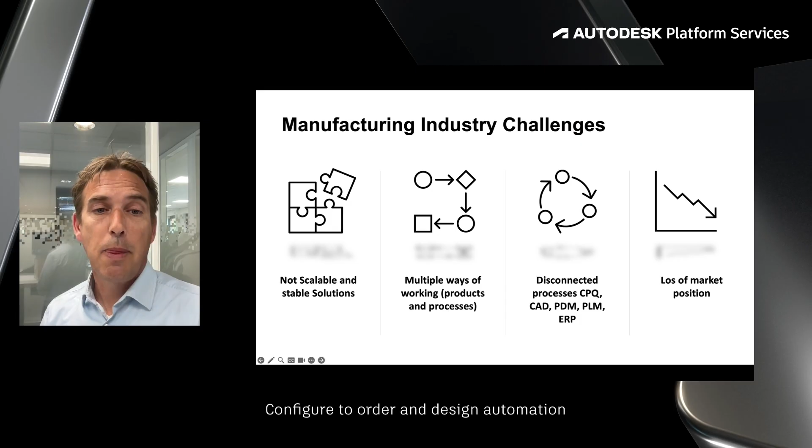So in current times, we see a number of challenges that many companies struggle with. Finding the right balance between product leadership, customer intimacy, operational excellence, it's not easy. So let's talk about some more specific challenges for the manufacturing industry. Application customization causing unneeded downtime, leading to errors and troubleshooting. One-person armies and external dependencies, loss of data, double and manual workload, no reuse of data, long lead times in sales and engineering processes. Or common challenges in the construction industry.

Global earnings before interest and tax on construction activities is just 5.5%. So even the smallest mistakes can make or break the project. And projects are becoming increasingly more complex, yet the schedules keep shrinking. 80% of construction companies cannot find the workers they need. Teams are becoming more and more distributed, with stakeholders split between various offices and the field. And we believe that adopting a configure to order strategy in your company will help you to overcome these industry challenges. So let's take a deeper dive into what we mean with configure to order.

When we look at our customer processes, we recognize in general three types of primary business processes. We identify these processes as configure to order, engineering to order, and design to order. There are two main differences that separate these three types of processes. The first difference is about the moment in time when the required product data is being created. For CTO, the product data is already prepared and available upfront in the process. For ETO, some adjustments or small new designs are created after the order is received. And for DTO, design to order, more development cycles are required, so the actual useful data is being created at a later stage in the process.

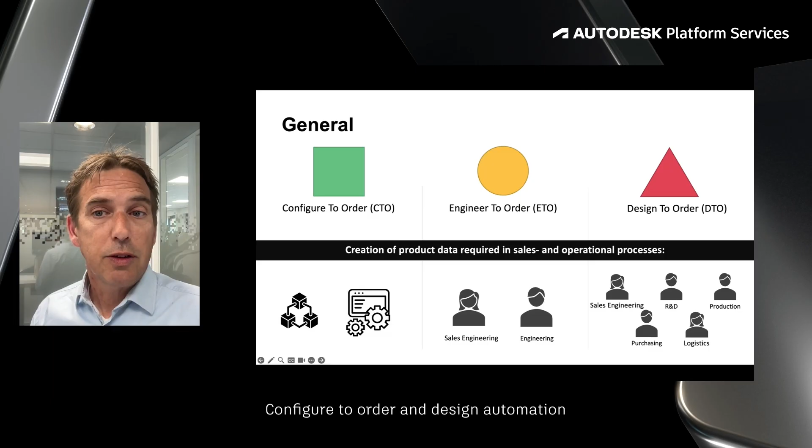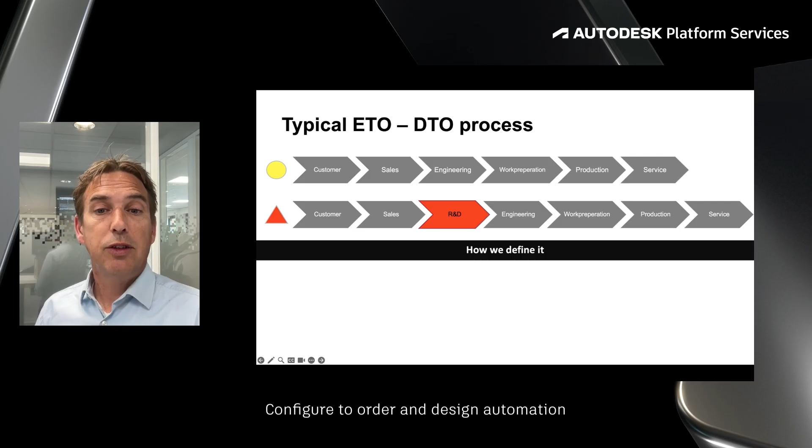On this slide, we see two main processes often defined as ETO and DTO. Both processes begin with a customer and a salesperson getting clarity and an agreement on the commercial and technical requirements. Once there is an order, the engineer starts by designing the product. And once new functionality is required, R&D people join the process. When the product is released, work preparation and purchasing can start with calculation and purchasing components. If all the required components are produced and delivered, the assembly process can start. After testing, the product can be commissioned and installed at a customer site, and maintenance is transferred to the service organization. Within these processes, people refer to a product as a one-of-a-kind product, specials, or customer-specific solutions.

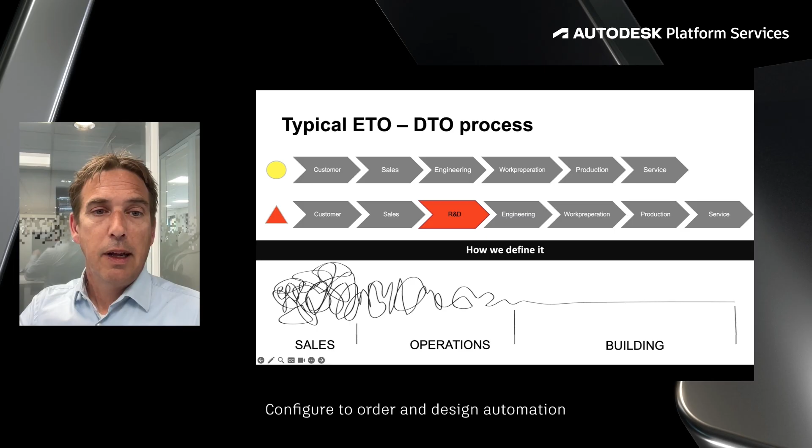At the bottom, we see how these processes are being experienced by the people within the process. Due to all kinds of missing information and unclarities within the specification process, a lot of communication and rework needs to be done to be able to deliver a functional product. It appears that every time these processes are executed, they are experienced for the very first time. So to get a better understanding, let's take a look at some first-time experiences.

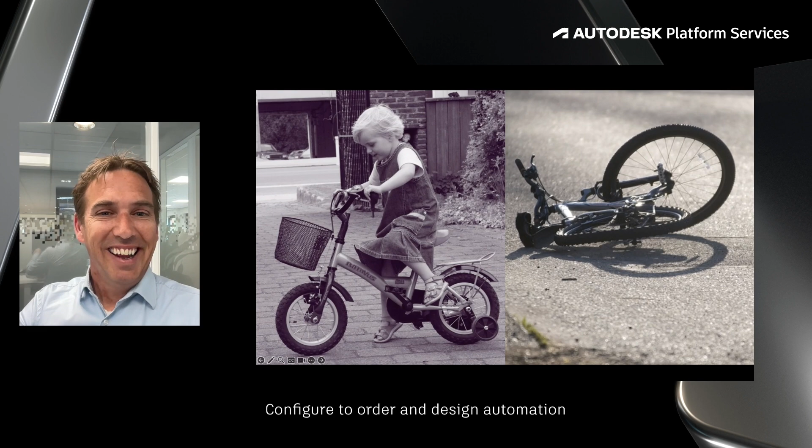In the Netherlands, everybody is used to riding a bike. We have about 18 million people and 22 million bicycles. So to be able to survive on a bike in Dutch traffic, we need to learn to ride a bike at a very early age. And what was it like riding a bike for the very first time? For me, it didn't work out that well. Yeah, as well as driving a car for the very first time. The first time didn't go well either.

So try to imagine what happens if we perform a cycling activity for the 1000th time. We have developed and prepared our equipment, we know where to go, and we know when to finish. We're able to improve every time we perform the activity. It goes a lot better.

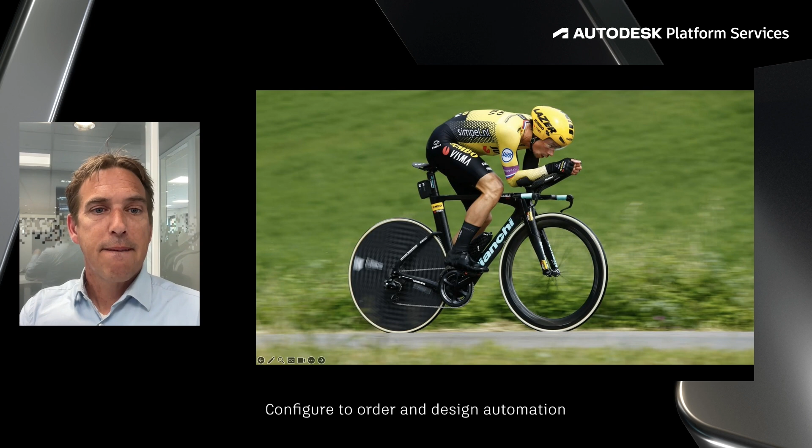So Mark is going to show you how configure to order can help you out, and what it means for the processes and people in your organization. So Mark, please introduce yourself. Thanks, Pim. Thanks for the introduction of our CTO process. My name is Mark Brouwers. I'm a developer working at the same company as Pim, so we are colleagues at Cadac. So I want to continue with the technical in-depth information on how we achieve this CTO process.

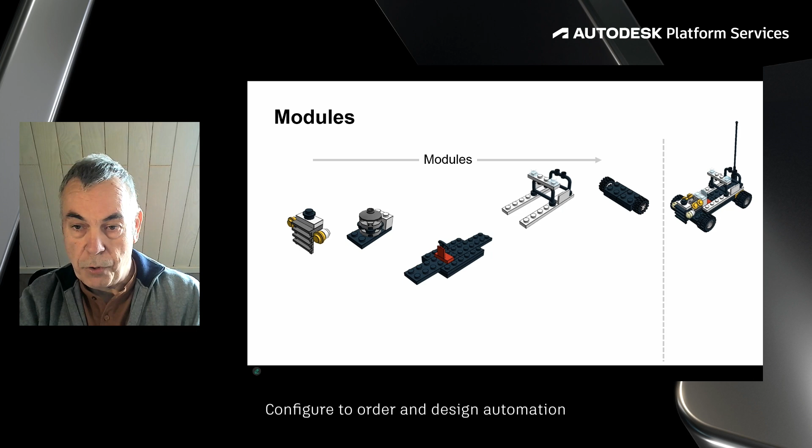Imagine the Lego car on the right side of the slide as one of the specific products of your customer. For a manufacturing company, this product could be a machine. For a construction company, the product can be a house. Every product consists of some typical components. These collections of components we call modules. In general, we see that a module is a generic collection. It has no physical representation or identification. So on the screen, we see 5 modules. A front module, an engine module, a chassis module in the center, a body module, and an axle module on the right side.

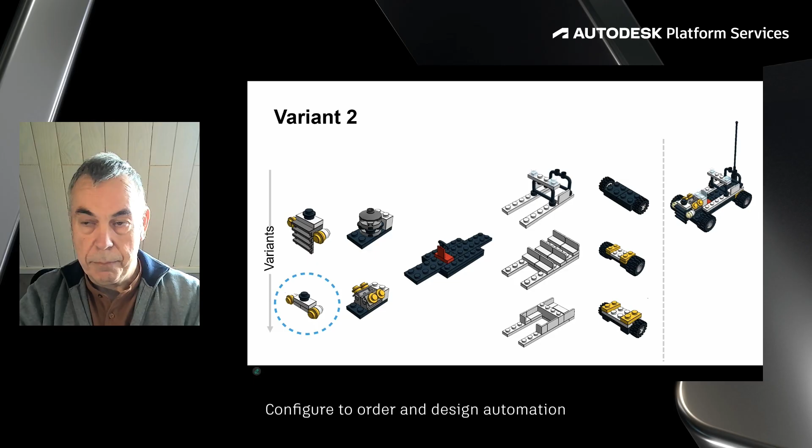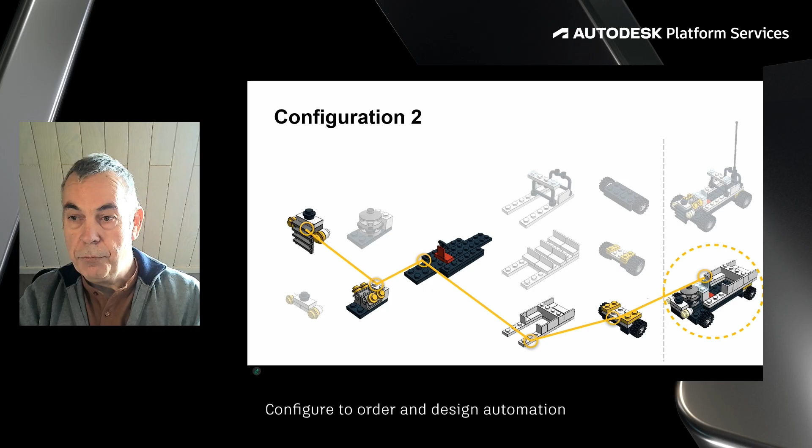As you can see, there's one exception. The chassis located in the center of the slide. There is only one variant of this module. So this means that every car uses the same execution of the chassis. So this makes some people very happy. All right, to create a product, we need a certain set of interfacing variants which can be combined. The product in the yellow circle on the right, we call a configuration. So if we want to create a different product, we use a different set of variants to create a different configuration.

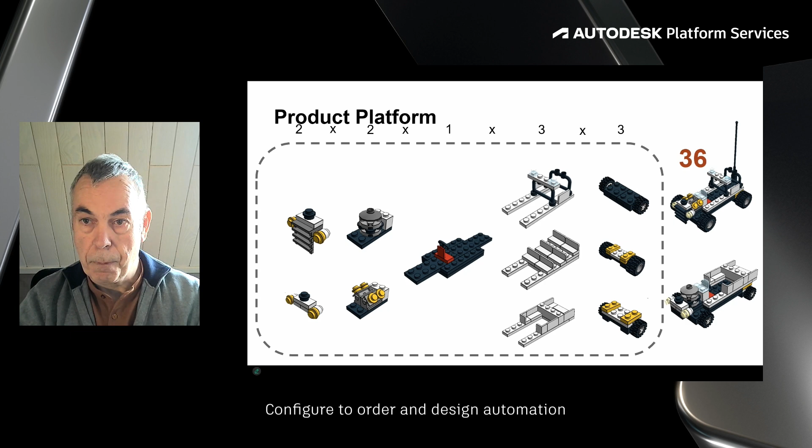So the collection of all those variants, we call this a product platform. It is important that the content of the product platform matches the market needs for a certain period of time. This is where product management begins. In this example, the Lego product platform consists of 11 variants. So this is the sum of all the variants. Instead of the sum, we can now multiply the variants. That gives us 36 unique product configurations. So with 11 variants, we can create 36 configurations. And we maintain the specifications and documentation of only these 11 variants instead of 36 end products. So that's a huge difference in terms of workload for the organization.

This picture shows how to identify the type of product deviation in the product structures of a configuration. The CTO product configuration contains only variants from the platform. So it is a 100% CTO configuration. If the product contains any ETO or DTO specifications, the interaction with the other variants needs to be validated at the product level. Of course, we embrace and stimulate the use of CTO variants within ETO and DTO products as much as possible.

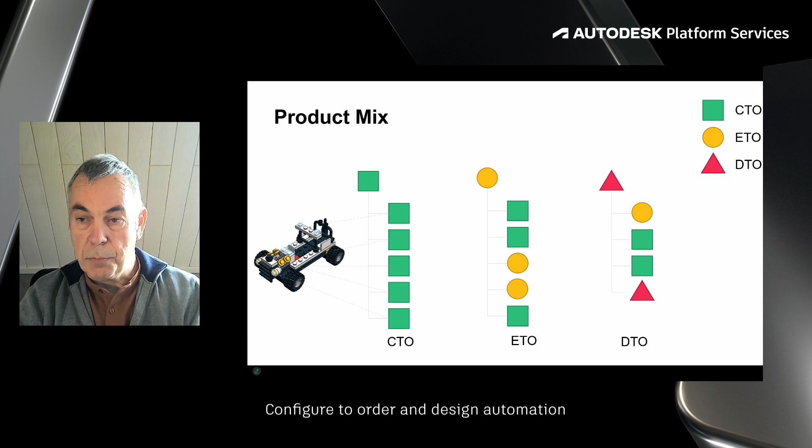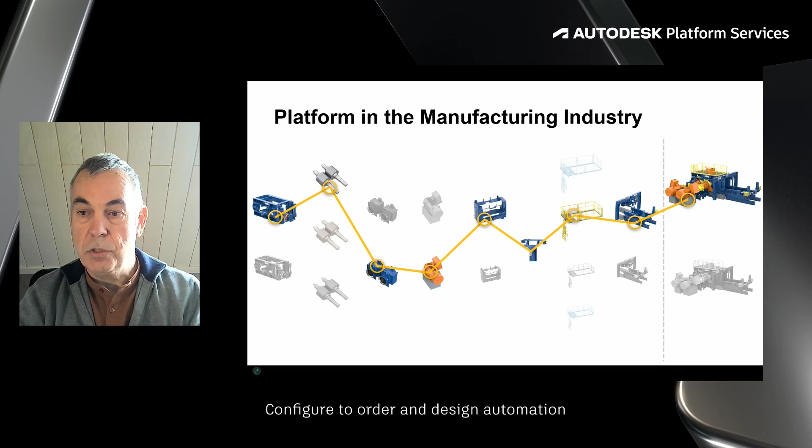So the first thing a company should do when implementing a configure-to-order strategy is defining a product platform. In this example, we see a derivative of the product platform of one of our customers within the manufacturing industry. So if this is possible with Lego or within the manufacturing industry, why not within the construction industry? So imagine this example with facades, doors, windows, window openings, window frames, and bricks. In this example, we already have 324 different configurations as an end product for the facade.

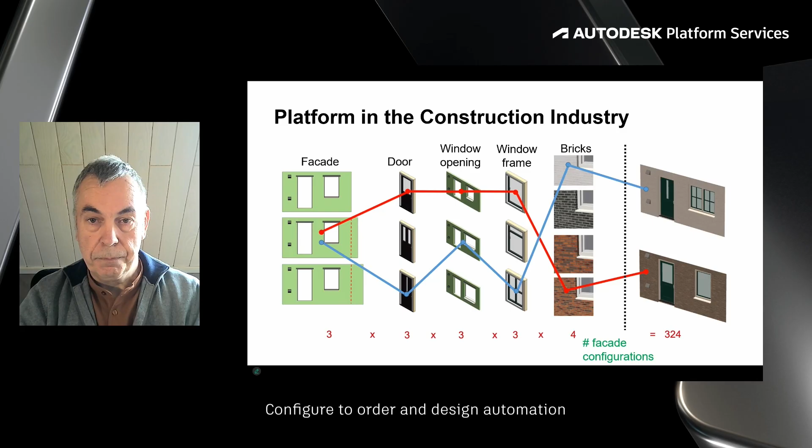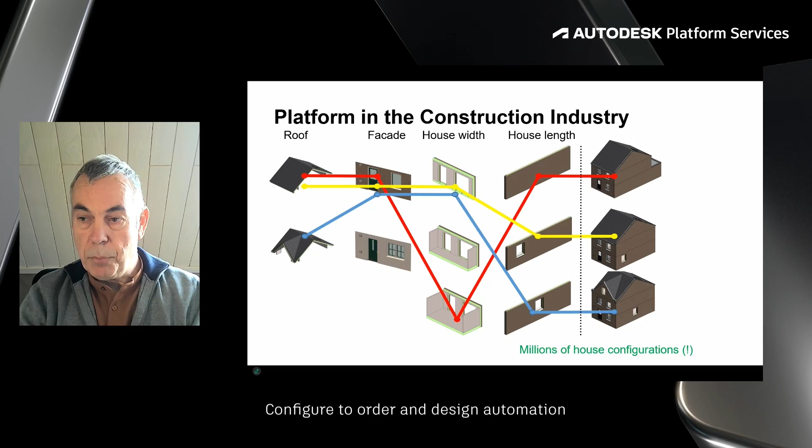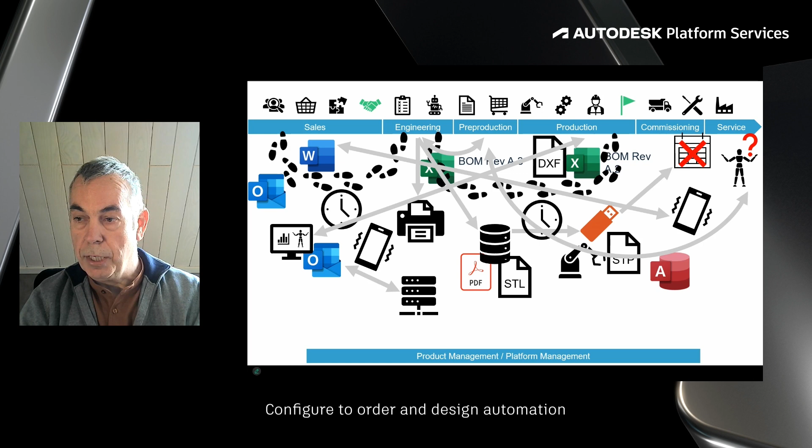All kinds of applications support a specific part of the process. We see that integrations are most typically solved via point-to-point connections, a direct connection between two information systems. Point-to-point connections appear in many forms. For example, as a commercial plugin, as a manual export, as a custom solution made by an external expert, or via some tool found on the internet. This tangle of one-on-one integrations is not scalable into the future and very difficult to maintain.

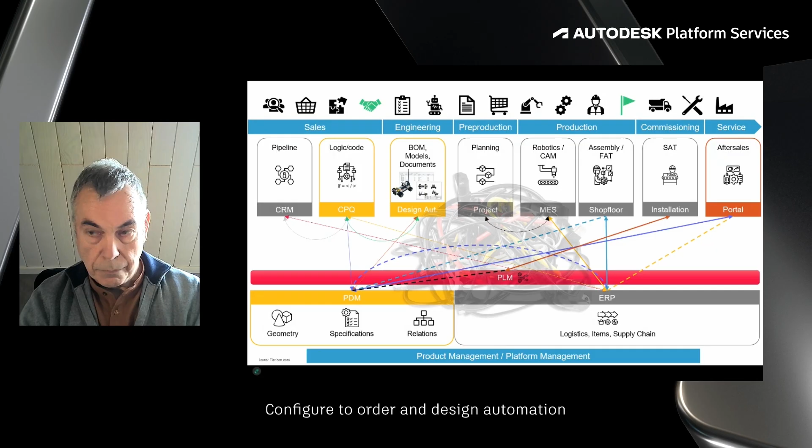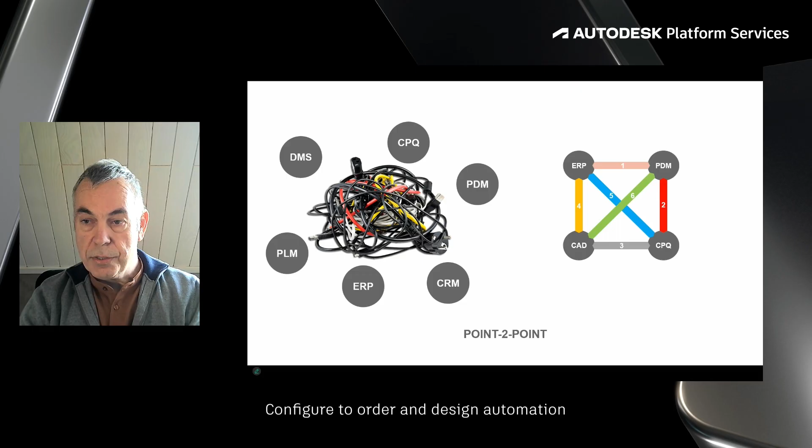Managing point-to-point connections can be a challenge because they rarely come alone. In practice, many point-to-point connections exist in the form of scripts running on different servers, log files created on locations all over the place, etc. This is an issue since central overview is lacking. As a result, changed data still gets overlooked and related processes simply go wrong. The alternative is an integration platform with the objective of centralizing the data exchange between information systems by means of clear orchestration and the shared technology for setting up each point-to-point integration.

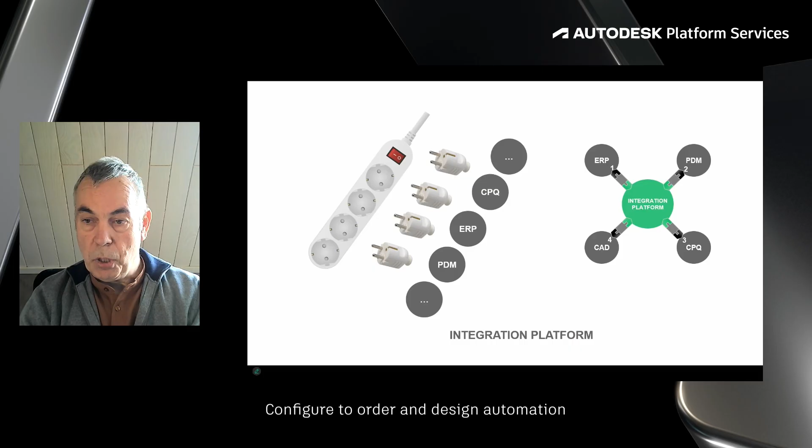Each organization is unique, as are related integration requirements. So in order to fit within existing processes, the system integration should be flexible. The flexibility can be offered by using a low-code platform. This slide is showing an overview of applications within an organization connected through an integration platform. Each application has a connector, a connection to the platform. There are many standardized connectors for the most used applications, but as long as the system has a REST API, a connector can be created easily.

Within one or more scripts, the business logic to read or write information in the system is customized. Instead of a spaghetti of connections between applications, it offers a very structured methodology which can be expanded over time. For this presentation, we will focus on the CPQ, design automation in APS and PDM.

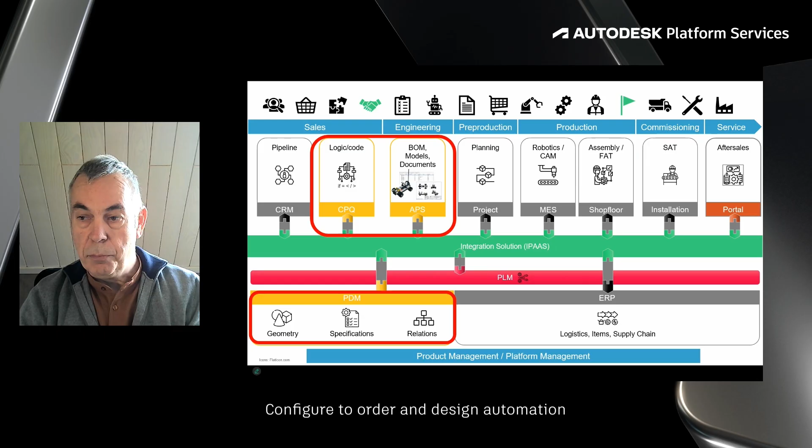The design automation process in combination with the PDM system is a very complex process, involving a very large number of automated actions. As a result, there are also many possible points of failure. If one part of the process fails, it could leave a mess behind with unused documents in your PDM system, and it will cost a lot of time to do this all over again. Therefore, we implemented a phased methodology in our design automation approach. The complex process is split up into 4 phases: prepare, process, assemble, and manage.

We will take a look at each phase in a moment, but one thing to point out is the flexibility of this phased approach. By splitting up the design automation process, we have the ability to outsource the processing part, where Inventor or Inventor Server does the magic. The process phase in this case is offloaded to Autodesk Platform Services.

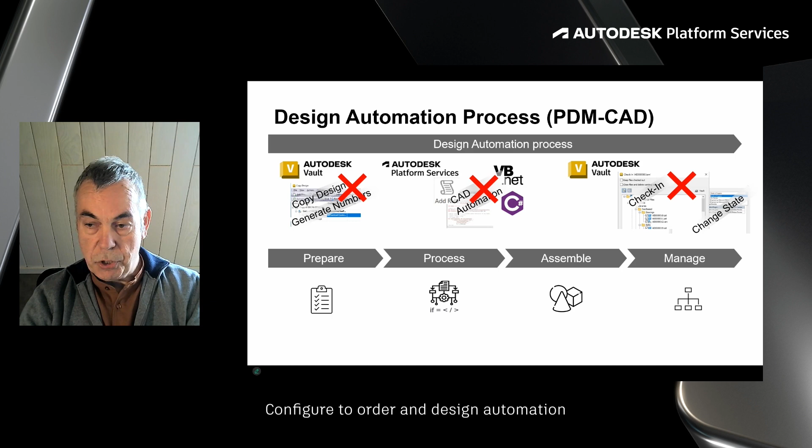Let's take a detailed look at the phased approach and how the whole process comes together. At first, the integration platform receives a message from an external system, in this case the CPQ system. Scala Connect acts as a conductor of the whole process through a so-called orchestration script. This type of script is capable of creating a task, and it will wait until the task reports back to the script.

The first task involves adding a preparation job to the Vault job queue. When the job is picked up by a job processor, it will take up the input passed on from the CPQ system through the integration platform. Input could be, for example, the product type to instruct Vault to create a copy design of a base model, the destination folder involved, and so on.

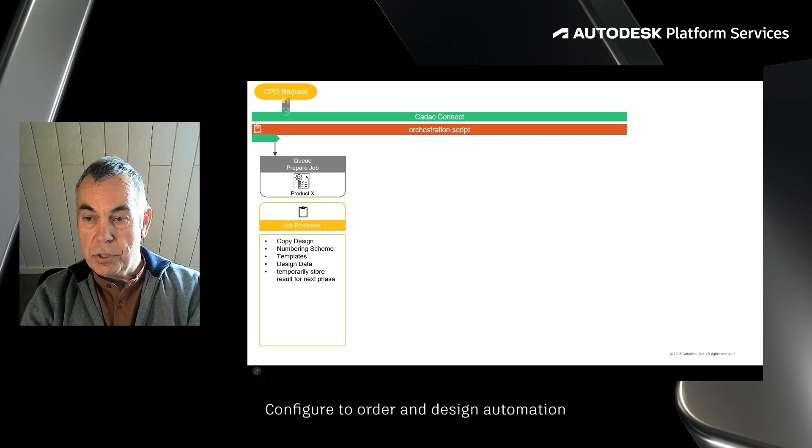It can also retrieve templates and design data to ensure that the next phase has all the input necessary to be processing. The gathered data is temporarily stored in a zip file in Vault. Then the job reports its status back to the integration platform, and the orchestration will start the next task.

The second task involves the starting of a workflow in APS. This workflow contains several steps. The upload of the activity definition. This has to be done because it has to be changed between two configurations. Uploading the app bundle. Same goes here. The app bundle could have been changed over time.

Uploading the results of the prepare job to a bucket. The zip file containing the copy designed files is being placed so that APS can reach out for them. Configuring a work item with the parameters from CPQ. Then start the work item. During this step, the custom code, so C# and iLogic code, will be executed and the copy design structure is formed into an order-specific model.

Download the results from that work item into a bucket. Assemble all the generated models that are present in CPQ, so in your code. This type of task is optional and will only be required if two or more process products need to be assembled together. Download the final assembly with all the configurations and upload it into Vault, and notify the main orchestration in the integration platform that this phase has been completed.

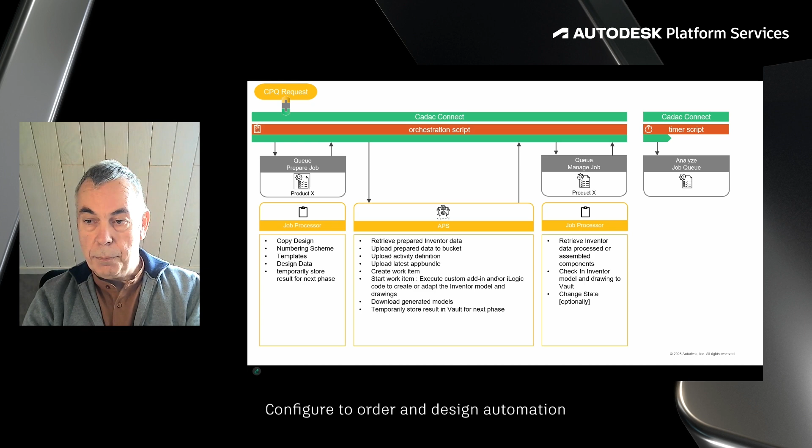The nice thing to point out about the platform is that it can handle many tasks in parallel. In this example, you can see a separate timer script that runs every couple of minutes to monitor the job queue. And when there are more than, let's say, 50 design automation jobs in the job queue, the script can start an additional Azure virtual machine to help handle the jobs. With all this in mind, the system is capable of scaling itself up and down.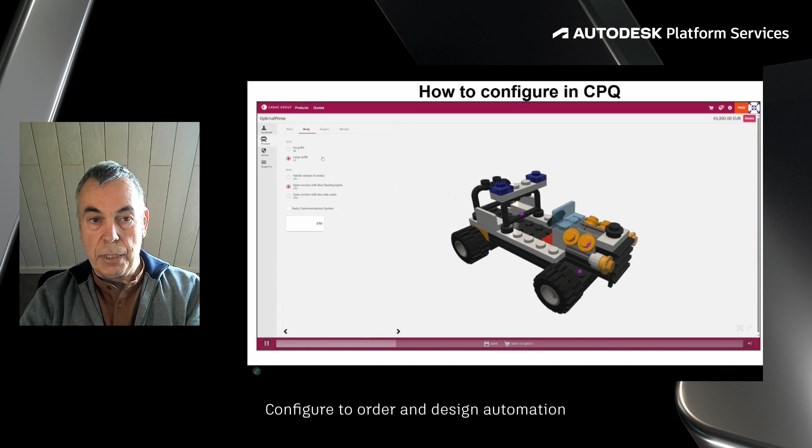Afterwards, you can use this default configuration and start adapting something. In this case, when you change the length of the antenna, the system knows that it's no longer CTO, but it switches over to ETO. You define the reason you have to change it to an ETO. Additionally, you can per product specify which type of Autodesk engine you want to use, Inventor Server or APS, and even the version. You can even change some custom parameters.

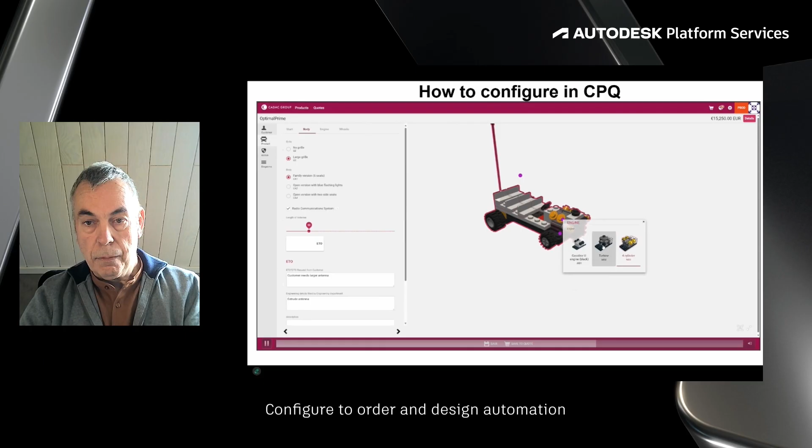Once finished, you save your final product definition to the quote. You enter a quote identification, and you start your workflow. So by submitting this quote, you will start the workflow in CPQ. It comes to a state ETO because it was an ETO product. So the main engineer approves this quote and it will start in the state building the model.

So what we can do in CPQ is define the engine to be used, the flavors and even the version that you want to use, and you can alter all parameters of your product configuration. So we now have in CPQ a quotation with, for example, 6 cars present, so that have 6 configurations that have to be created during the process.

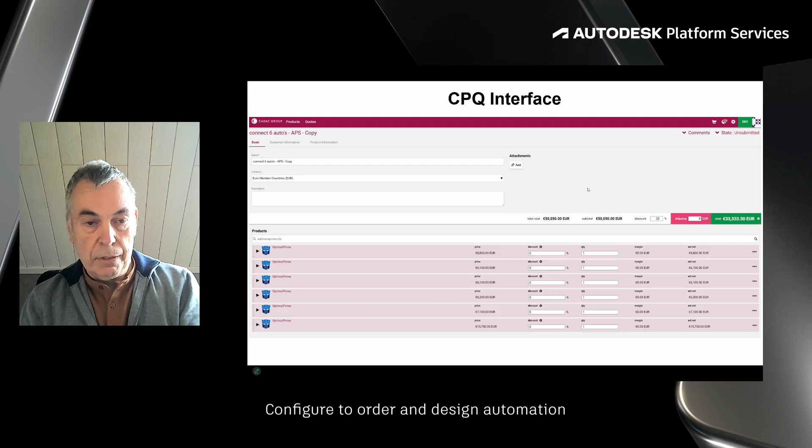How is the CPQ data transferred into the workflow in Connect?

Depending on the structure in CPQ, a JSON fragment is constructed in the CPQ workflow. For each configured product present in the quote, a configuration has to be created by Inventor. At the same time, some parameters necessary for the Vault design automation jobs are pushed towards the orchestration, such as numbering scheme, assembly name to copy design from, and the app bundle to use.

Once the orchestration is started, its implemented workflow will create the different types of Vault jobs. These jobs will execute their implementation and use the callback URL to signal when the job has run. This external information is processed inside the orchestration, which will cherry-pick this information for each stage in the process.

Nowadays, most job processors reside in the cloud and can be started or stopped when needed. As soon as the main orchestration is triggered, a first check is performed to see if any job processor is running. If not, start the machine, and if there are too many jobs waiting, start an additional one. The main orchestration then receives a list of available machines to pick from.

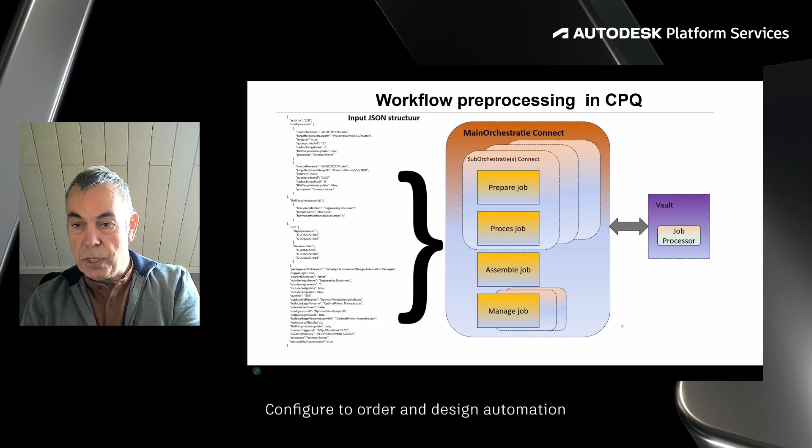Within CPQ, there's a workflow active. As soon as you submit your quote, this workflow is started. At a certain moment in this workflow, the quote triggers a function in Connect. The main orchestration is launched and provided with the necessary parameters as indicated in the previous slide.

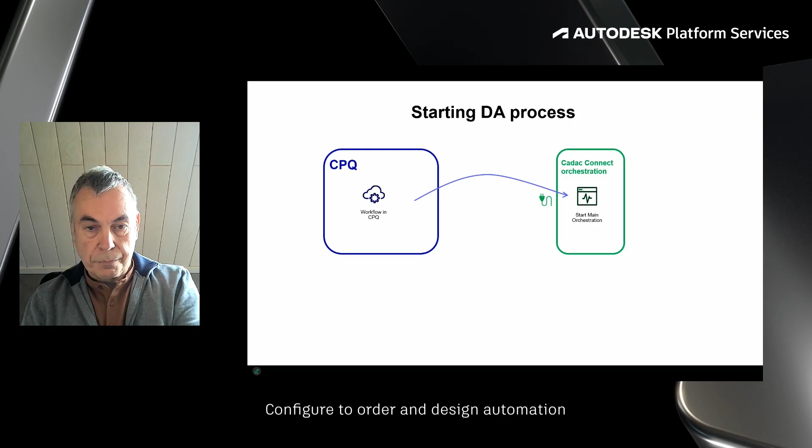The first task of the orchestration is uploading the activity and uploading the app bundle to APS. This app bundle was stored in Vault. This is mainly a user interface-less process. I will show you some of the logging.

Here is the URL triggered, the main orchestration is triggered. As you can see, an app bundle is uploaded, and the activity is uploaded into APS and set ready to be used in a later phase of the process.

As soon as it reaches the stage of creating the Vault jobs, the prepare job makes a local copy design of an assembly that you specified in your CPQ system. It makes a local copy design, but with Vault numbers generated from Vault. The copy design structure is afterwards packed and go and stored in Vault as a zip file. This zip file will be used in the second step when the CAD model is being processed.

The logging indicates that you got 2 process jobs. On the job processor, this job is picked up and executed, starting its work by making a copy design of a predefined assembly.

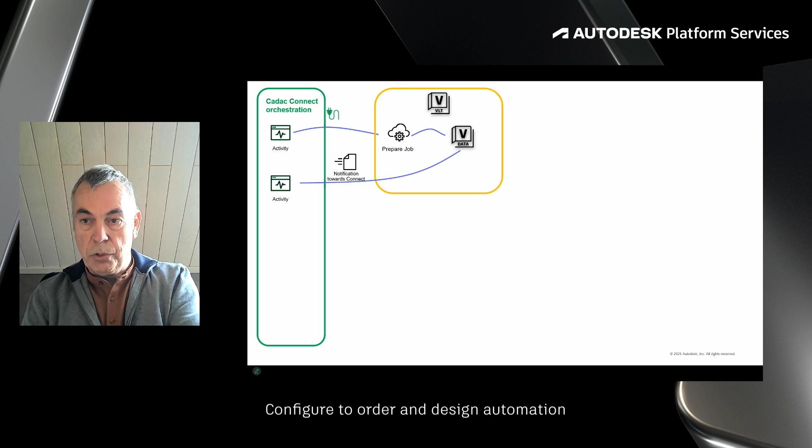As soon as the prepare job finishes its work, the main orchestration in Connect is notified, indicating that the job has done its work, and the next phase in the process can start.

The next phase consists of uploading the packed and go prepared data into a bucket. We create a work item and assign its parameters with data from CPQ. We start the work item and download the results as a zip file as soon as the work item has finished, placing that result back into Vault.

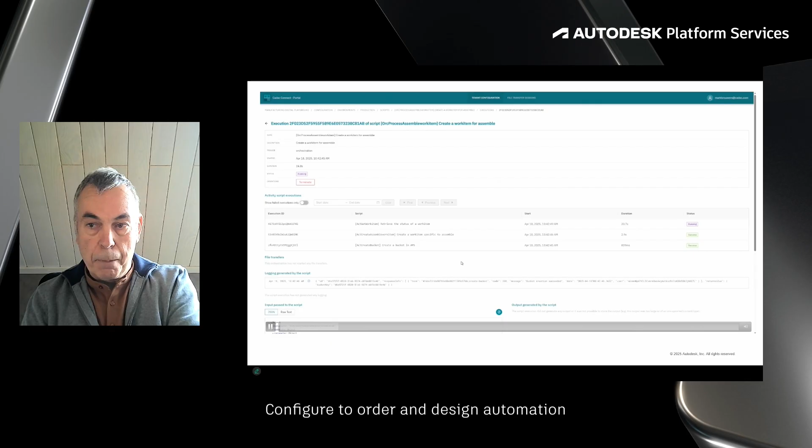A work item is created and started in APS. Data is uploaded to the bucket, and the work item is started. We check to see what it's doing, and get a report when finished. Let's see what's in that report.

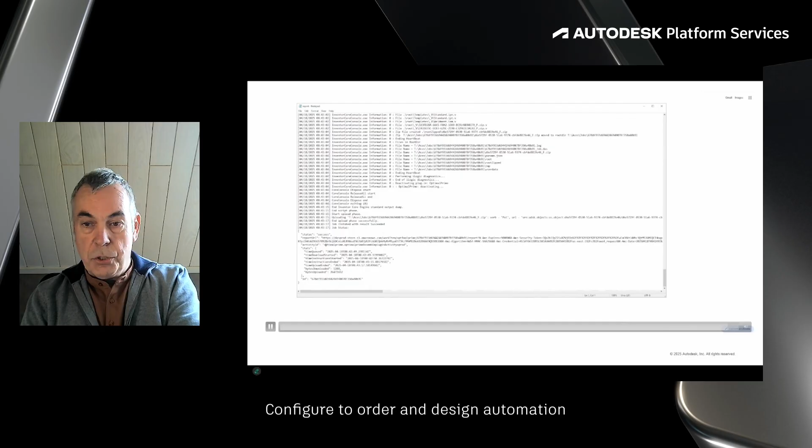The work item has run its custom code. There's a lot of logging present that we can inspect to see if something went wrong. As soon as this runs successfully, the resulting zip file will be downloaded to Vault.

APS has finished configuring the configured products from CPQ and needs to check in the results. The intermediate stages are buffered in Vault as zip files. The final result zip is picked up and opened in Inventor, then checked into Vault.

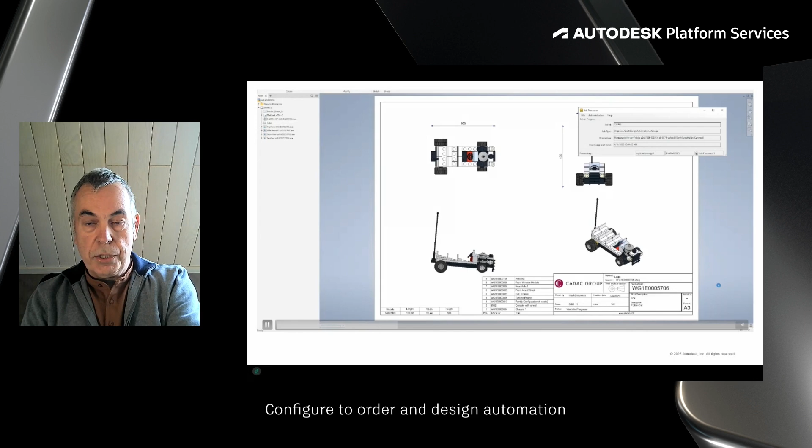That's opening the generated drawing and checking in this document. This is downloaded from Vault, from a bucket in APS, opened in Inventor, and checked into Vault by opening all the drawings present in the resulting zip file.

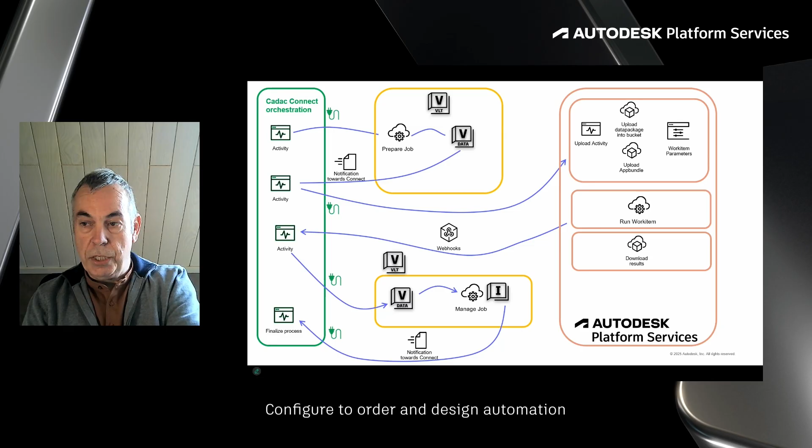So the managed job completes its task of checking in the generated model and signals back to the main orchestration that the design automation process is complete. The quote in CPQ is put in the next state as defined in the workflow, meaning the approval state was approved and an attachment was added to the quote.

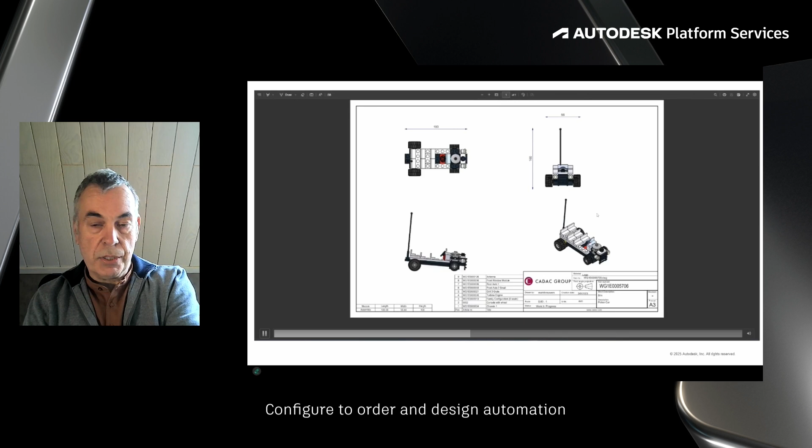So I was building the model. Now you can see that the quote I started from is now approved and has an attachment, the PDF, generated in the design automation process. And you can see in Vault, the model was checked in. The structure is custom defined on the naming, so you got your assembly, your ETO part, and your drawing in your Vault environment.

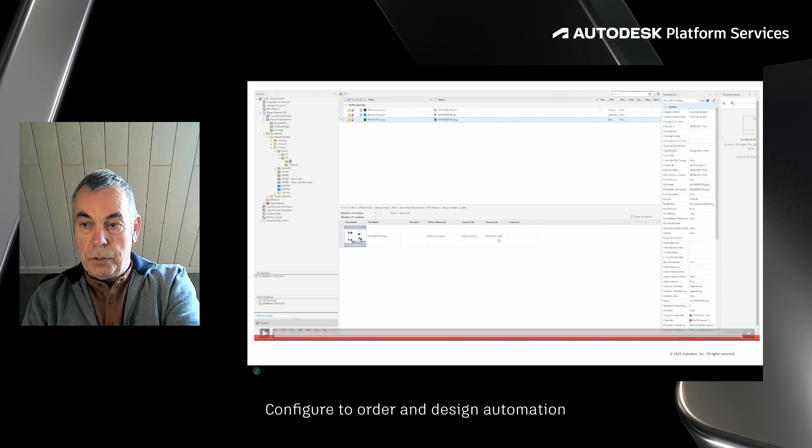So the engineer now has the ability to review and release the model so that Vault items are created and can therefore be used to integrate with other external systems, like ERP.

As you have noticed, there are a lot of workflows processing running side by side. Let's add another one: the workflow inside a work item. So the work item is started in APS. The workflow executes custom code which is defined in the uploaded app bundle. APS has no knowledge of any CAD models unless it was part of the copy design.

But when the custom code requires a component from your Vault system to be placed in your configuration, we can step out of the APS environment and call a REST function from Cadac Organice Vault REST service. This returns a data stream which represents my component, and I can put it back into my APS process in my design that I'm running at the moment.

So this open network from APS is nowadays standard. In the old days we had to request it from Autodesk. This is standard functionality now.

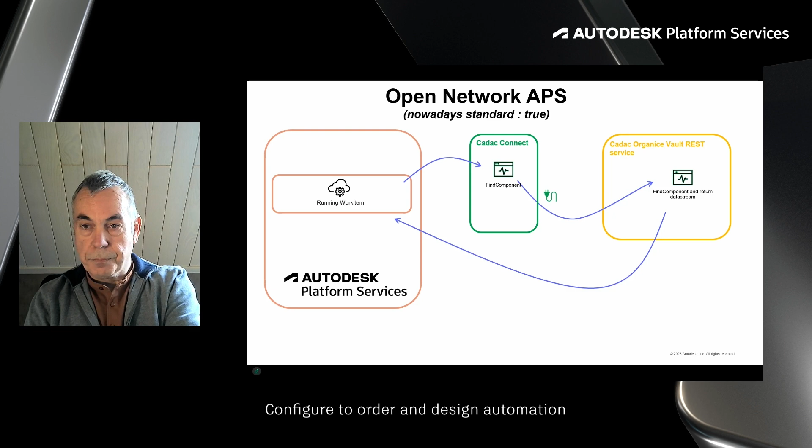Some more info from behind the scenes. So code snippets of the several platforms that are part of the CTO automation process. Many integration platforms pretend to be low code, no code, but at a certain point of time, functions need to be coded via traditional languages. This additional programming can be made easier by providing some kind of frameworks, so it resembles more like scripting.

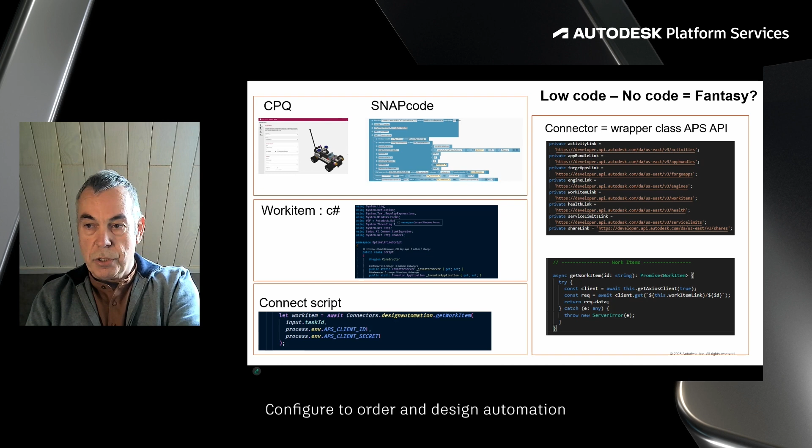So in this example, you got some in CPQ some SNAPcode. For the work item, you code in C#. Connect script uses TypeScript, and the connector is actually a wrapper class in APS API.

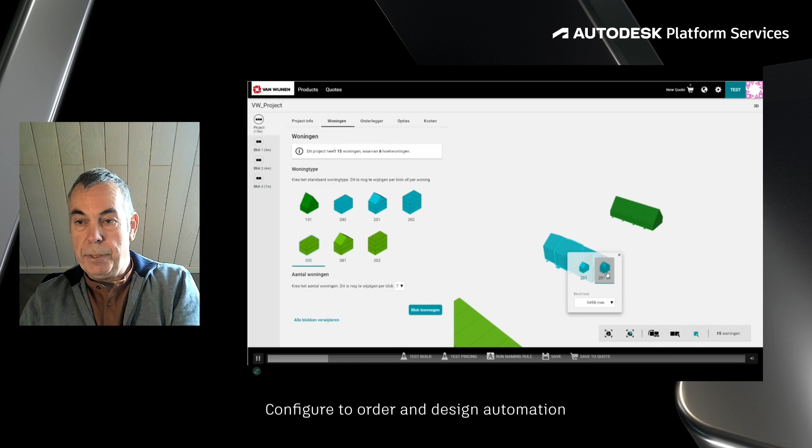Here you see a sample of a customer of ours, Van Wijnen, a construction company in the Netherlands. About 5 years ago, they started with their CTO journey. At this moment, they produce houses and even blocks of houses fully automated from sales to factory. The facade configurator gives creativity to architects to set specific characteristics of the outside walls of each house.

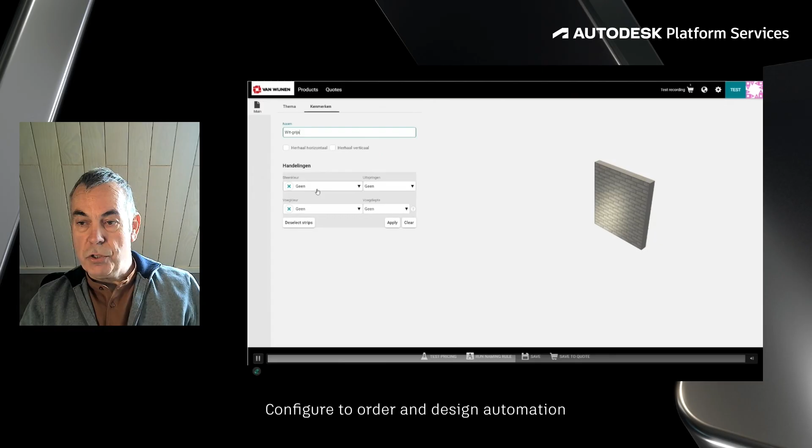Within the CPQ system, the price is calculated. The quote is generated, permit application documents are created. And it even results in a CAM file, handed over by the integration platform to the bricklaying robot that constructs the facade.

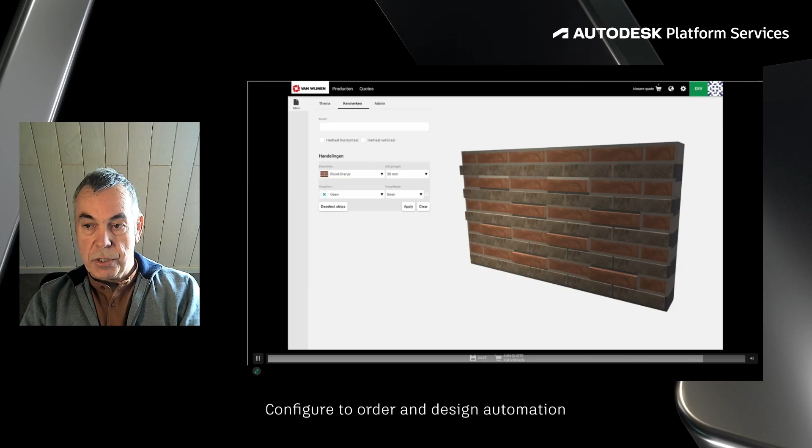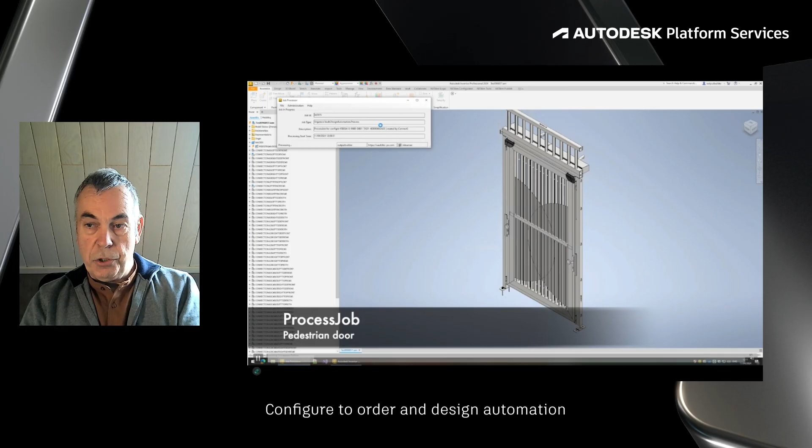Another customer, HTC Parking and Security, builds speed gates for securing parking garages, hospitals, commercial areas, and also military terrains. They started their CTO transition 3 years ago. Already 2 platforms are produced, fully automated by CPQ to production.

In this example, you see within design automation, how a recipe from CPQ is used to automatically create all the models, production documents, and BOMs.

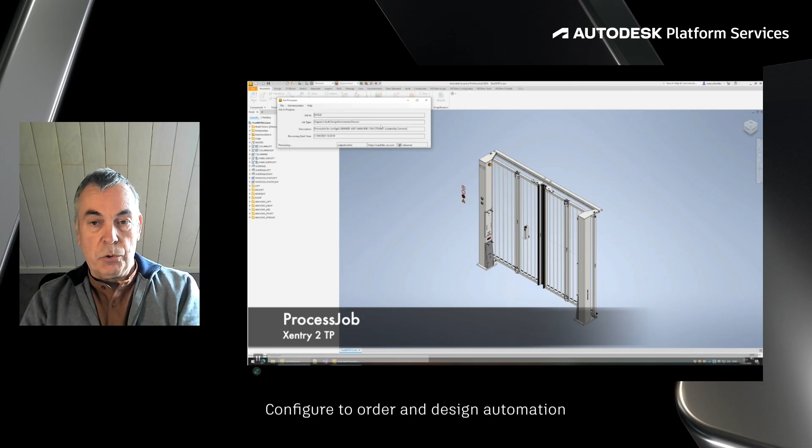So in this specific case, the quote consists of 3 elements: a door, a fence, and the speed gate. So you got 3 process jobs. Each process job does its own thing, creates its component, and afterwards all these 3 components are being assembled into one project assembly.

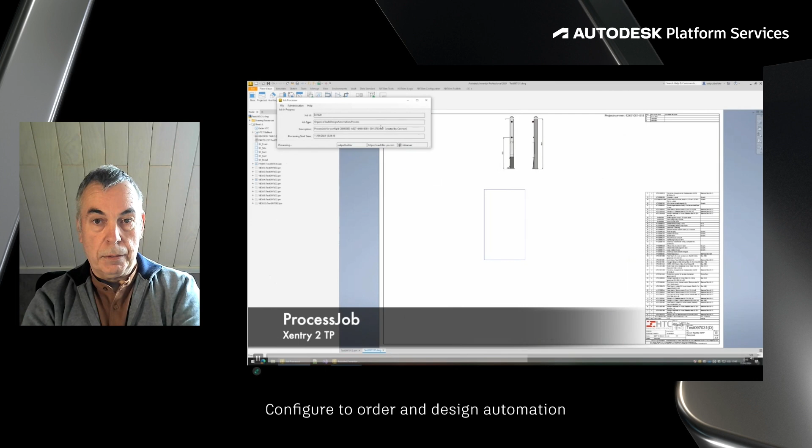The drawings are being generated for production purposes. Still processing.

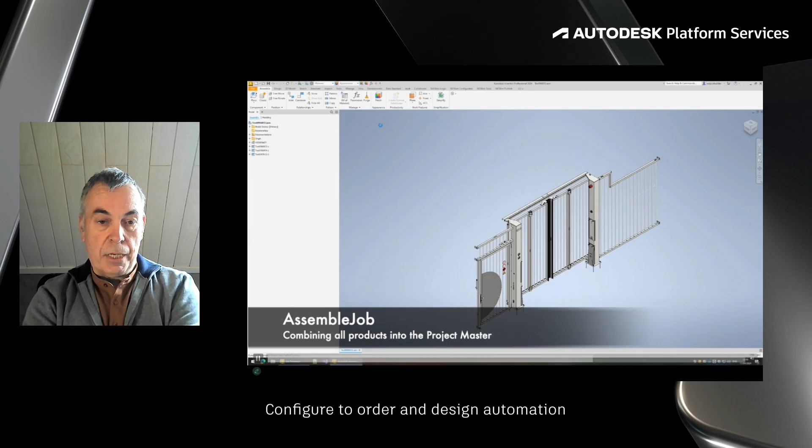So there are a lot of drawings automatically being generated and bill of materials updated. Finally, the assemble job: you see the 3 parts are being assembled. And then last is the manage job, which picks up that assembly and starts checking in all the drawings and CAD models used for this project.

And as soon as those parts are being placed into Vault, you can release them. Items are being created and used to be integrated into, let's say, an ERP system.

So I think this rounds up the explanation I want to do to fully cover the entire process from start to finish, starting at CPQ to finish at the Vault of an automated design automation process.